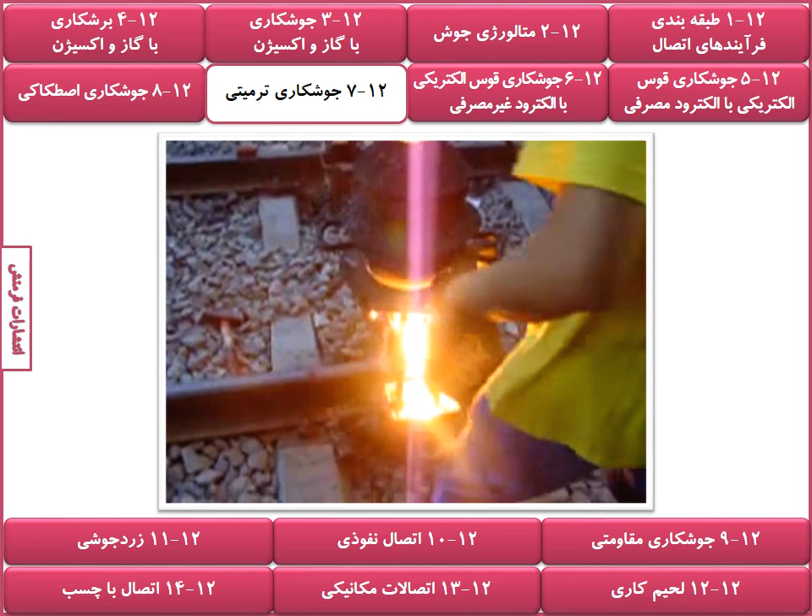How does inertia welding work? Basically, by forcing together pieces to be joined in such a way that rotary motion and pressure are converted into heat, which literally bonds the pieces into one part.

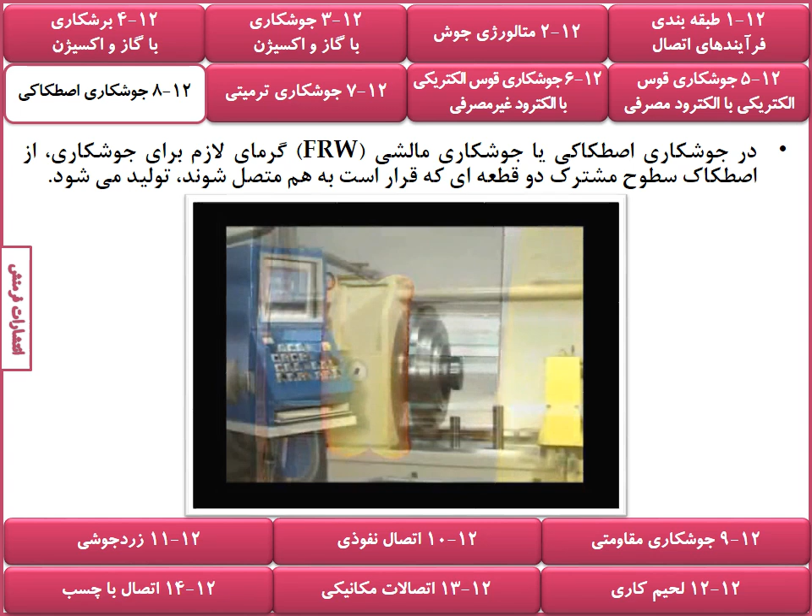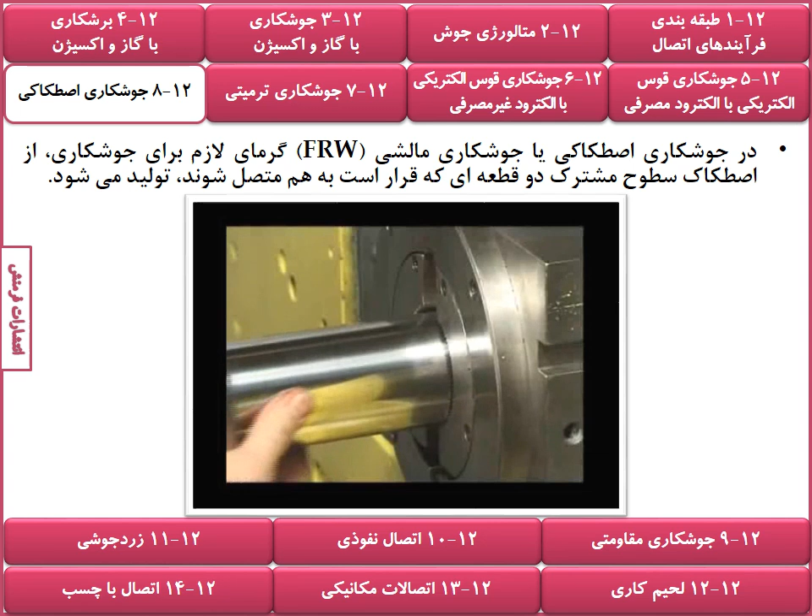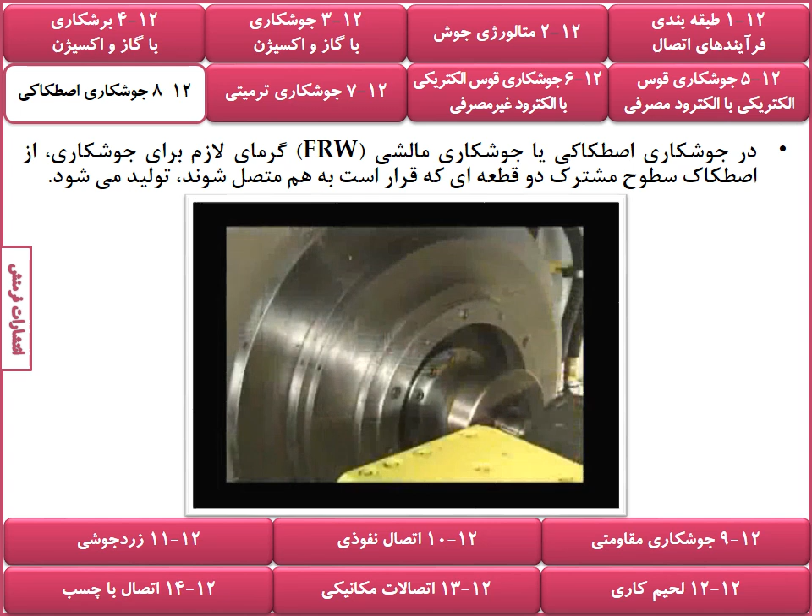Two pieces to be joined are aligned in an inertia welding machine. One piece is held stationary, the other is rotated rapidly on a spindle chuck attached to a flywheel. When the flywheel reaches a predetermined speed, it is disengaged and the freewheeling piece is forced against the stationary piece.

Friction between the parts heats the abutting surfaces to forging temperature. Just before rotation ceases, the two pieces bond automatically. When the flywheel stops, the weld is complete.

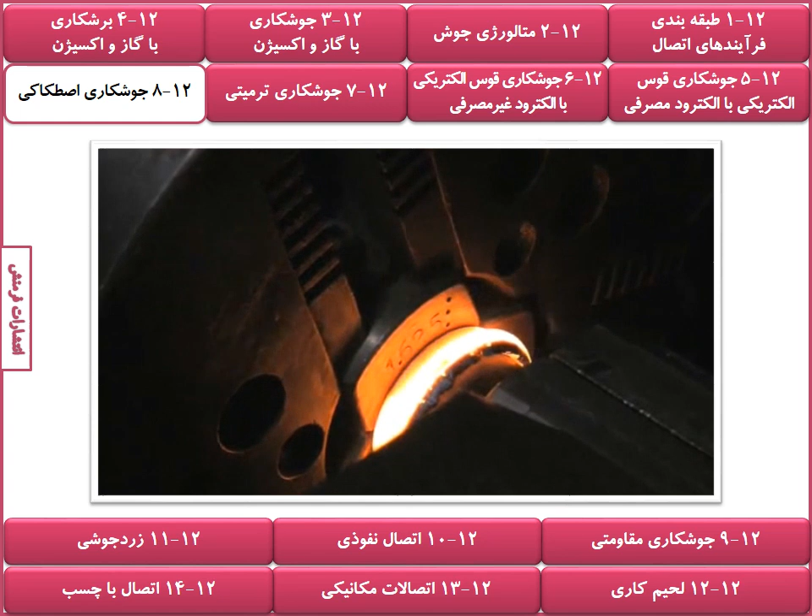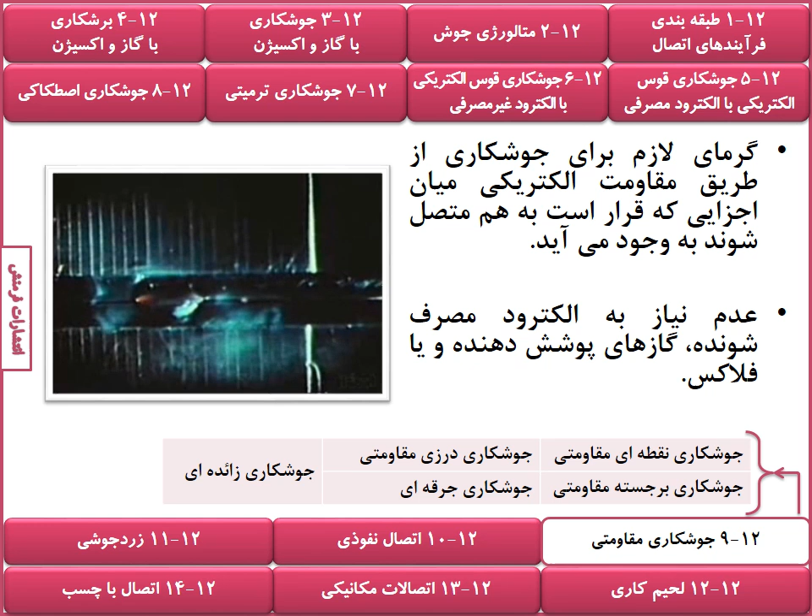With the aid of high-speed photography, we can see a projection weld as it takes place. A resistance weld is the result of steel components under pressure for a controlled period of time with current flowing, creating sufficient heat, causing the metals to coalesce.

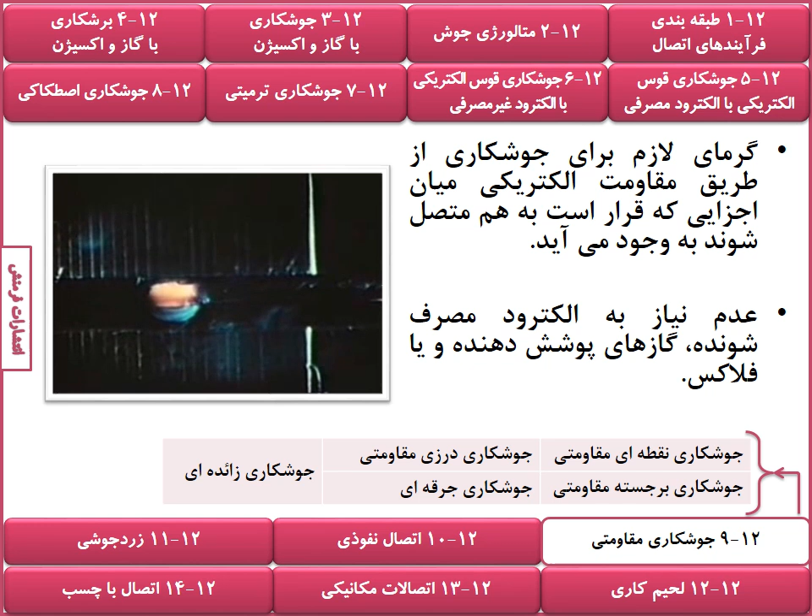When current ceases to flow and the area begins to cool, you have created a permanent bond. The basic factors for a resistance weld to take place are heat, time, and pressure. When these factors are in proper balance, an optimum weld will follow. This applies to both spot and projection welding.

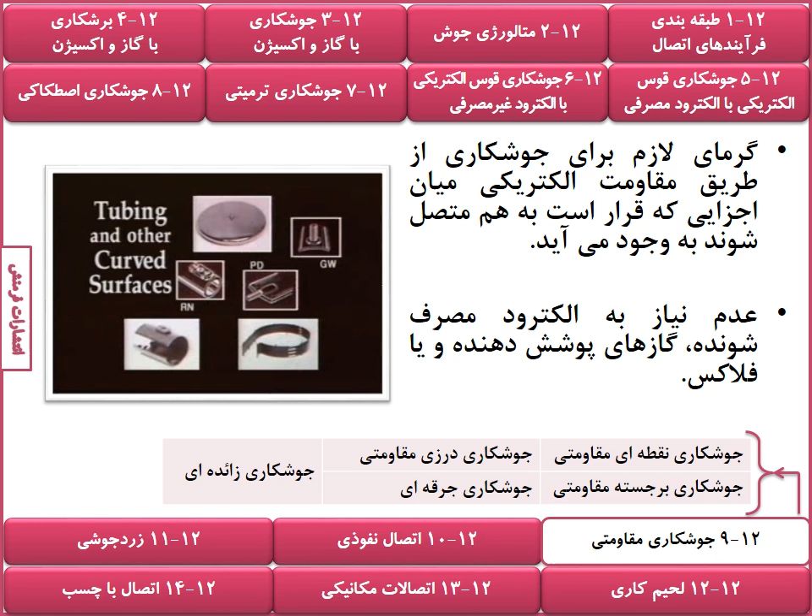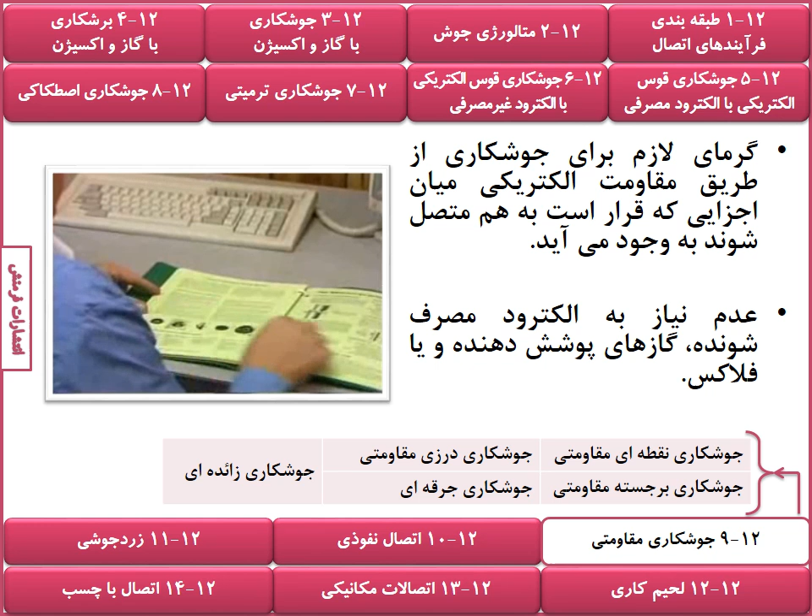Properly installed Ohio weld fasteners will provide an excellent attachment method without the need for secondary operations. Typical weld setups for Ohio parts welded to C1010 low-carbon cold-rolled sheets in a thickness range of 0.025 to 0.187 can be found in the weld data section of the standard Ohio weld fastener catalog. We have used these setup guidelines in all of our examples that will follow.

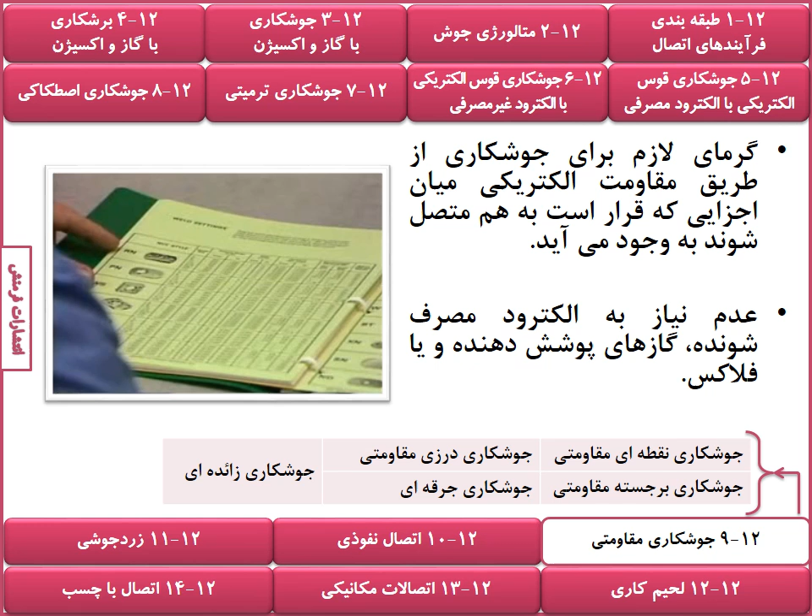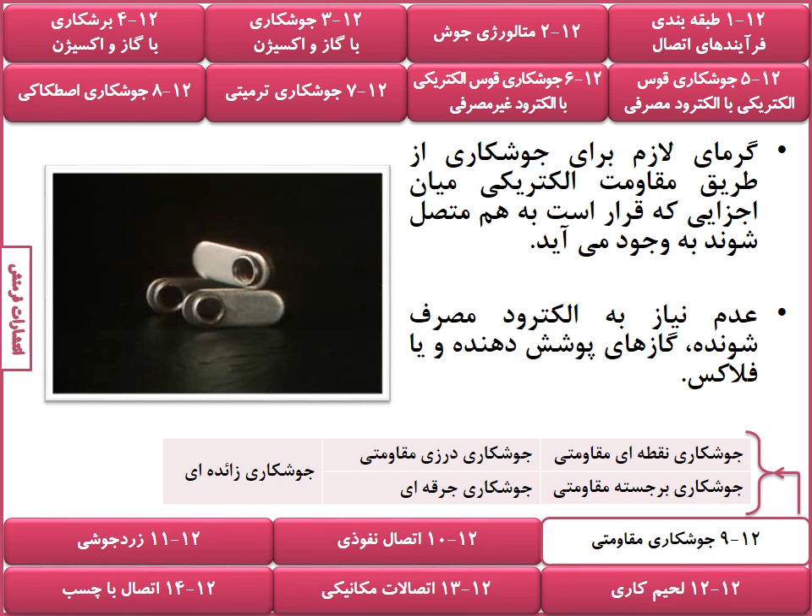We begin our weld demonstration with Ohio parts designed for spot welding. The first example is our XN style weld nut. The XN's narrow body enables it to be welded in corners and confined areas. The XN has a precision locating pilot, full threads, and is countersunk for easy entry of a mating part.

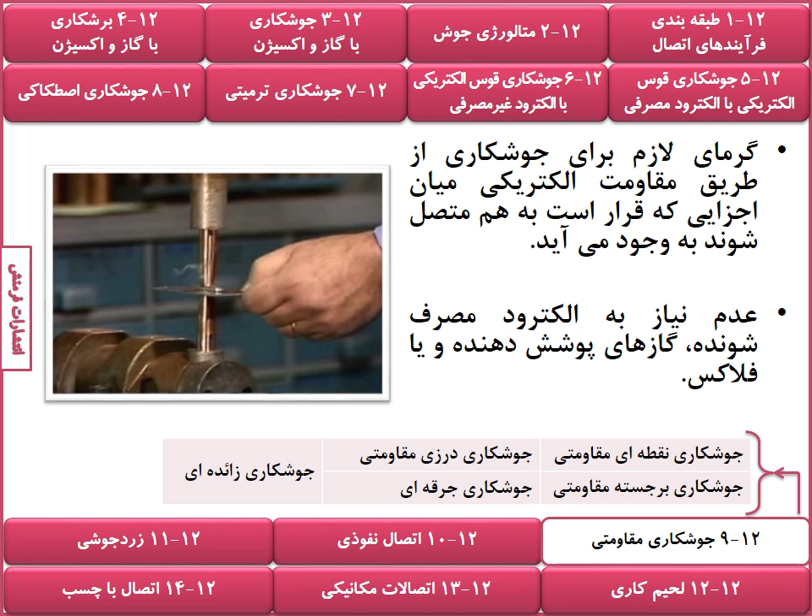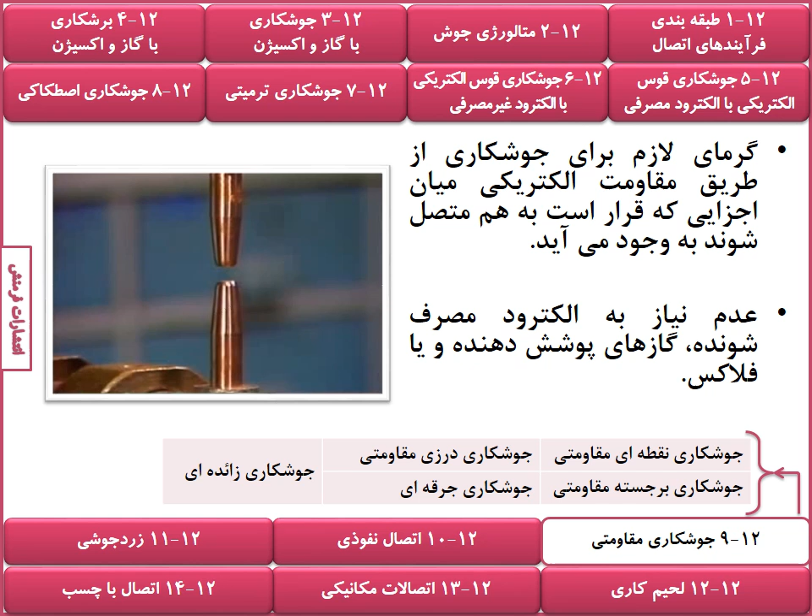As with all spot welding, the diameters of the electrode tips are extremely important as they control the size of the weld area. The basic spot weld technique of using a smaller diameter electrode tip on the thicker part and a larger diameter tip on the thinner material side is being used.

On the 1/4 20 and smaller XN sizes, there is a target area of reduced thickness. This creates a more favorable balance of material thickness when the XN is welded to lighter stock.

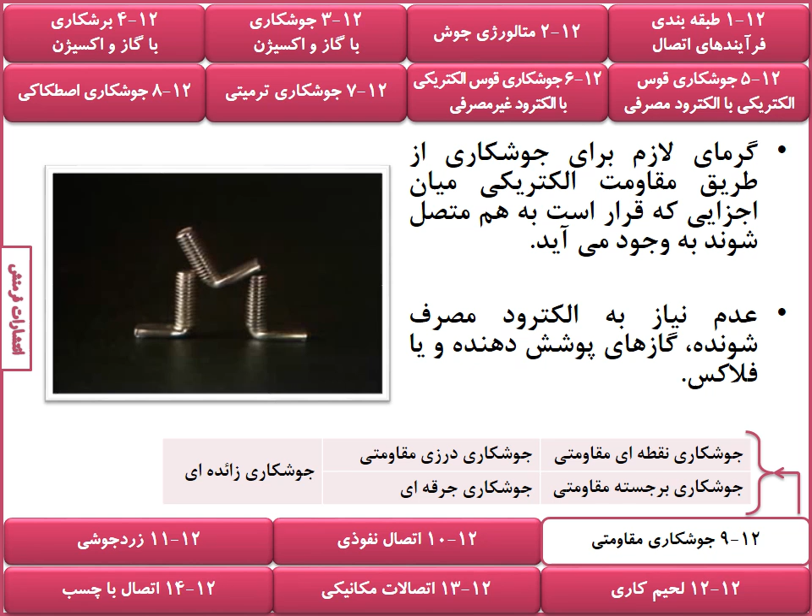Our SS-style spot weld spade screw has an ideally shaped flat spade at right angles to the threads. The spade permits welding to or through metal surfaces. The spade has been designed to be used with various sizes of electrode tips.

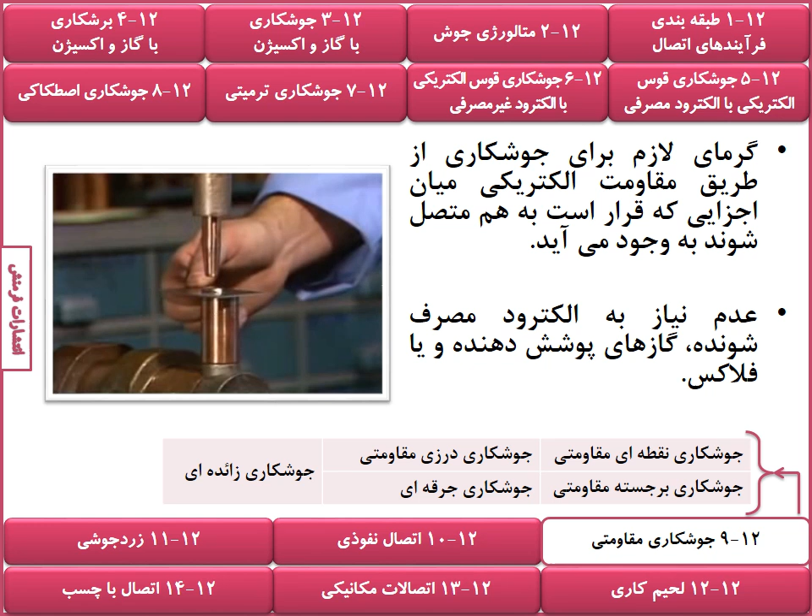It is designed to fit in confined areas, such as narrow channels, walled corners, and in those applications requiring threads offset from component surfaces. Again, the smaller diameter electrode will be on the thicker material, in this case the spade of the SS weld screw.

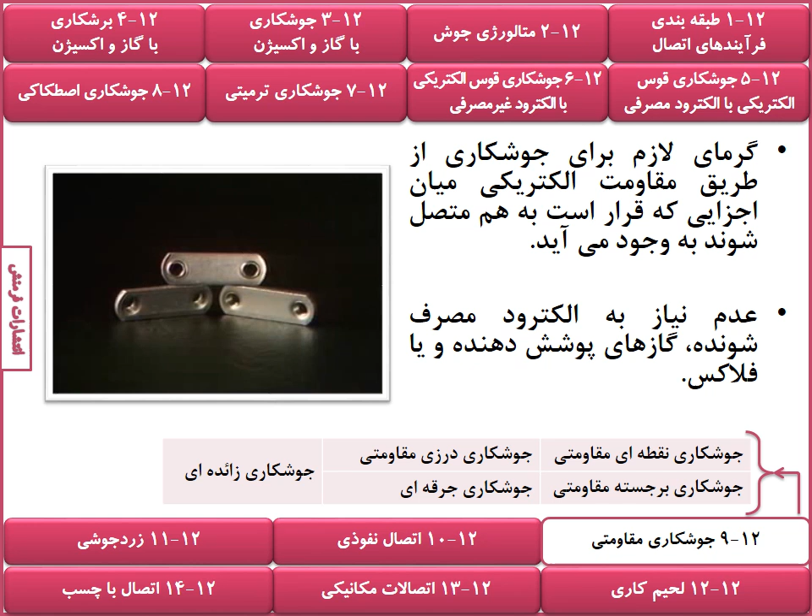Our final spot weld example will be an Ohio TP, a twin-piloted spot weld nut. Use of the Ohio TP nut eliminates the need for two individual nuts.

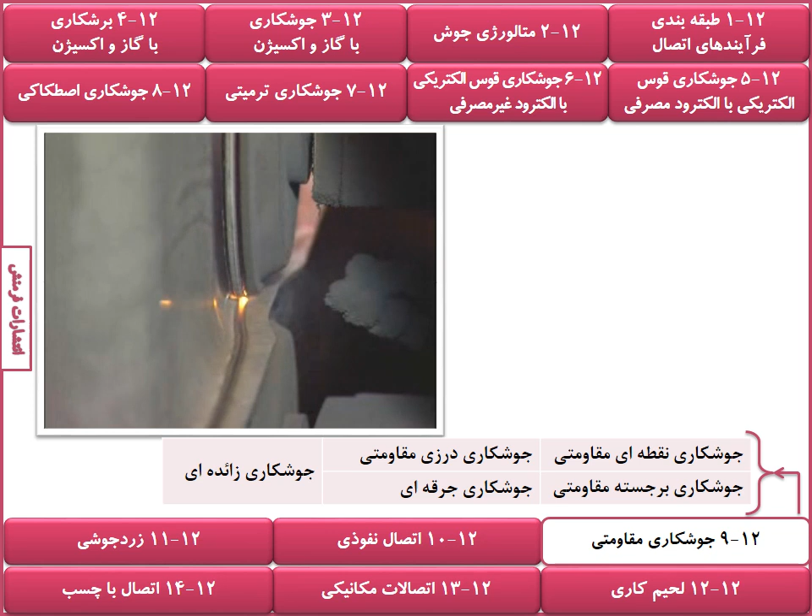Very high electric currents are used to quickly produce the resistance heat necessary for fusion. The three principal types of resistance welding are spot welding, seam welding, and projection welding.

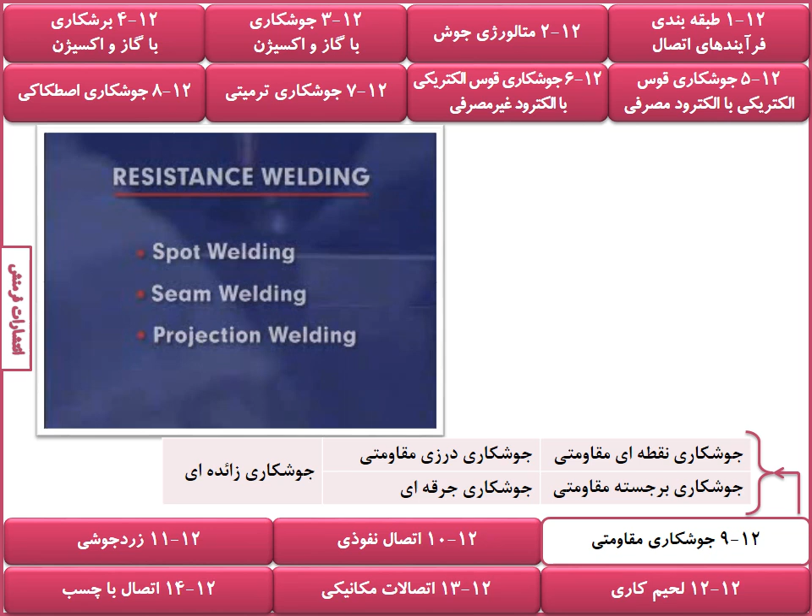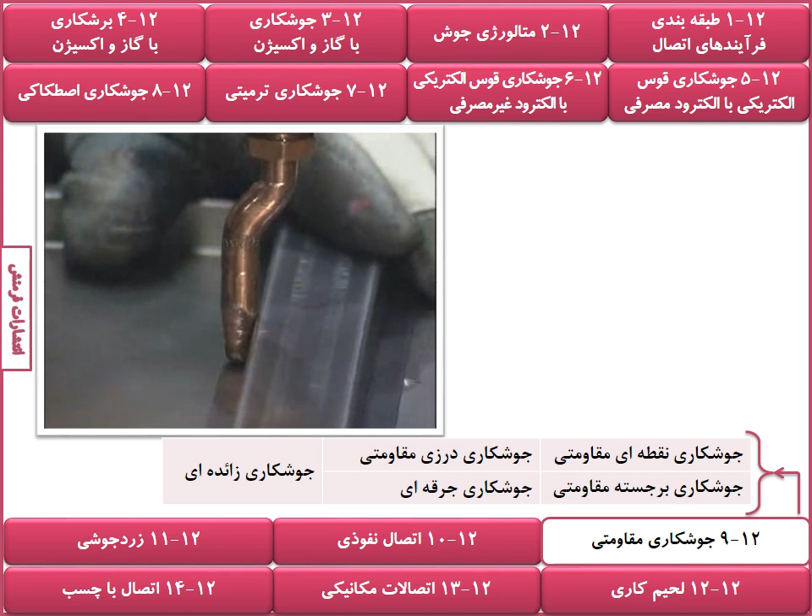Spot welding refers to making welds one at a time between the electrodes. One, several, or many individual spot welds may be required, depending on the application. Spot welding, with the electrodes maneuvered by articulated arm robots, is commonly used to join sheet components of automobiles.

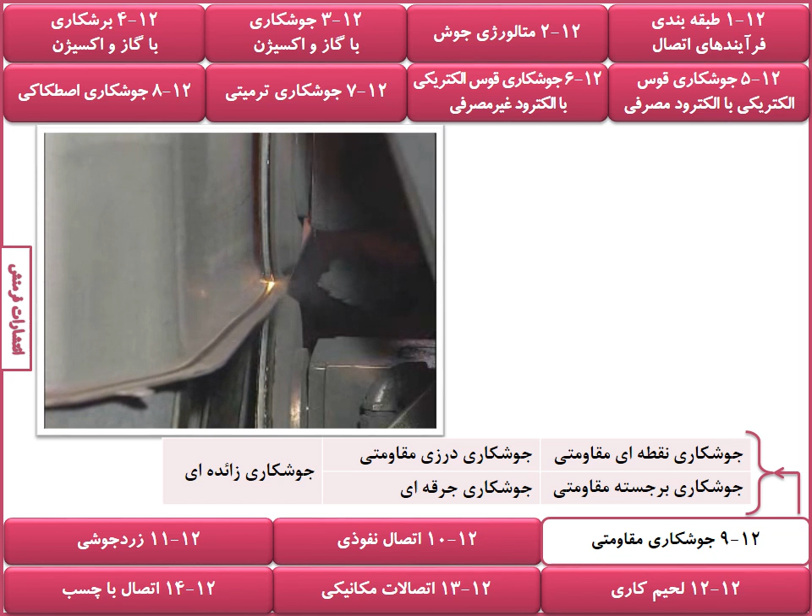In seam welding, coordinated pulses of electric current from rotating wheel electrodes produce a series of overlapping spot welds, resulting in a leak-tight welded joint.

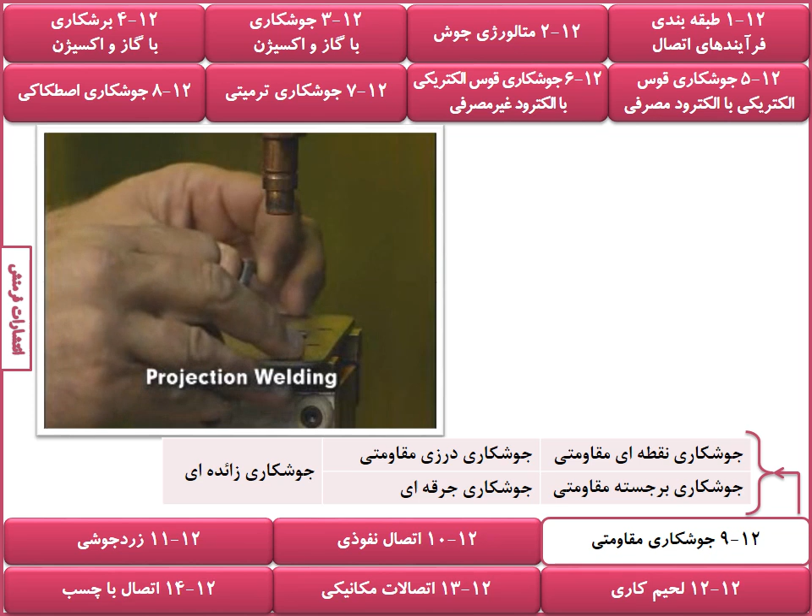In projection welding, the welds are localized at predetermined points by projections, embossments, or intersections. Several points may be welded simultaneously.

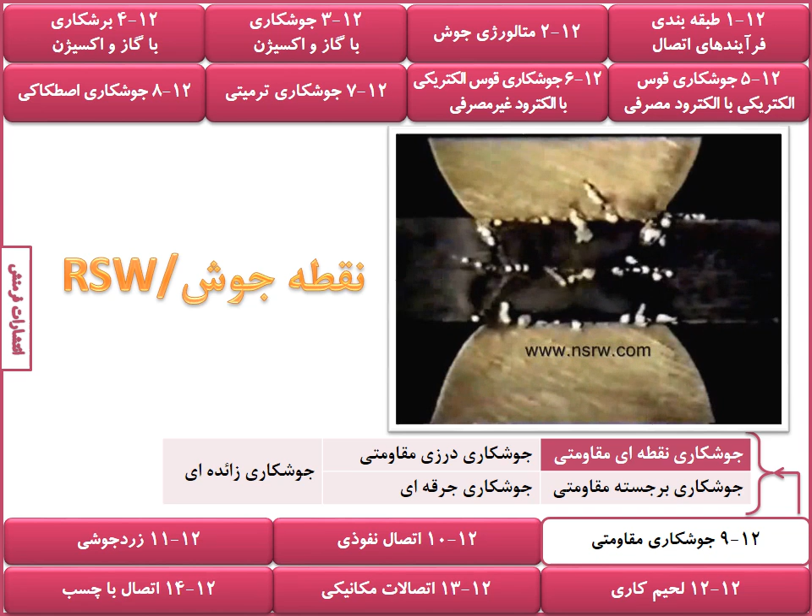NSRW is a metal service center. We specialize in copper and copper alloys. Our inventory includes chrome copper, zirconium copper, beryllium copper, copper tungsten, pure tungsten, and molybdenum. We stock rounds, squares, rectangle bar, hex, and plate. Our vast inventory allows for immediate shipment, most times same day.

Our inventory also includes a full line supply of welding components, from standard and special electrodes to controls, transformers, cables, and shunts. We customize our inventory for your specific needs, allowing us to offer just-in-time shipments for your convenience. We rebuild and retool old equipment, and we offer application and service engineers trained and experienced in all aspects of resistance welding.

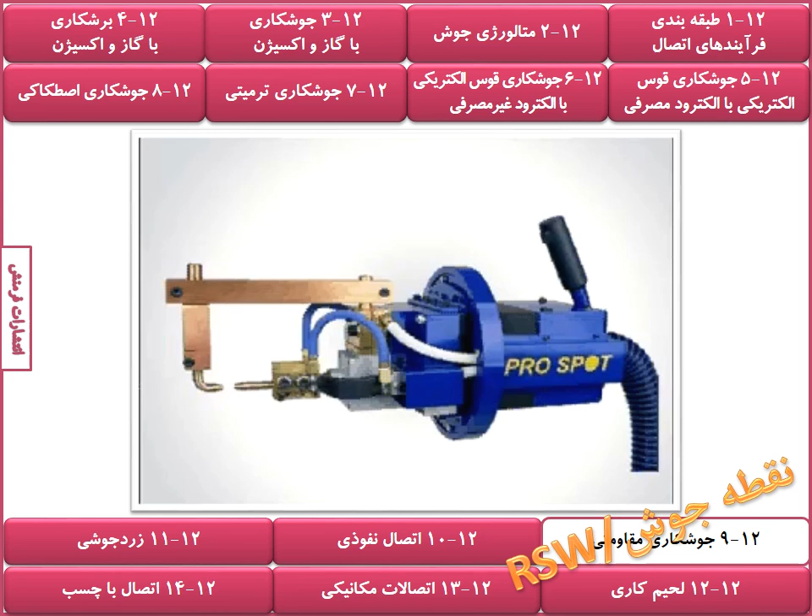A resistance spot welder is designed to deliver a low-voltage, high-current electrical pulse. The weld electrodes are made of copper because copper has a low resistance to current flow, which allows it to conduct electricity with ease.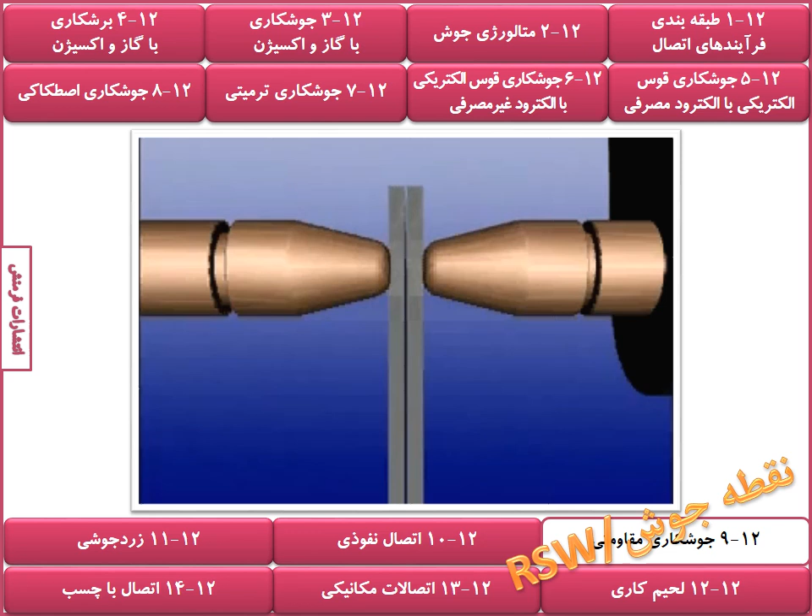Steel is a very poor conductor of electricity, and it will resist the weld current as it flows from the spot welder. The friction created by the current forcing its way through the metal heats the weld area to over 2,000 degrees Fahrenheit. The squeeze pressure from the weld electrodes now compresses the molten area and fuses the two metal surfaces into one solid nugget.

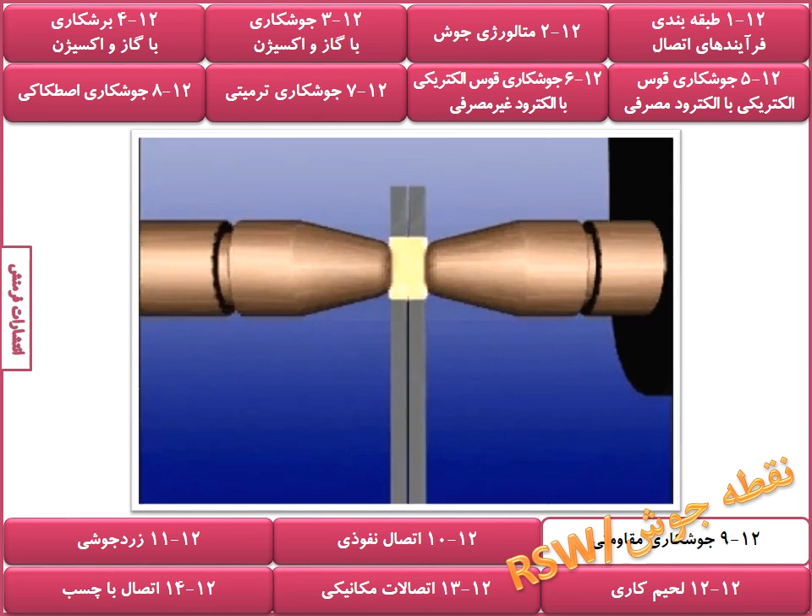By maintaining the squeeze pressure for a short time after the weld current is shut off, which is known as hold time, the molecules in the welded material remain compressed as the weld cools. This additional pressure results in a much stronger weld.

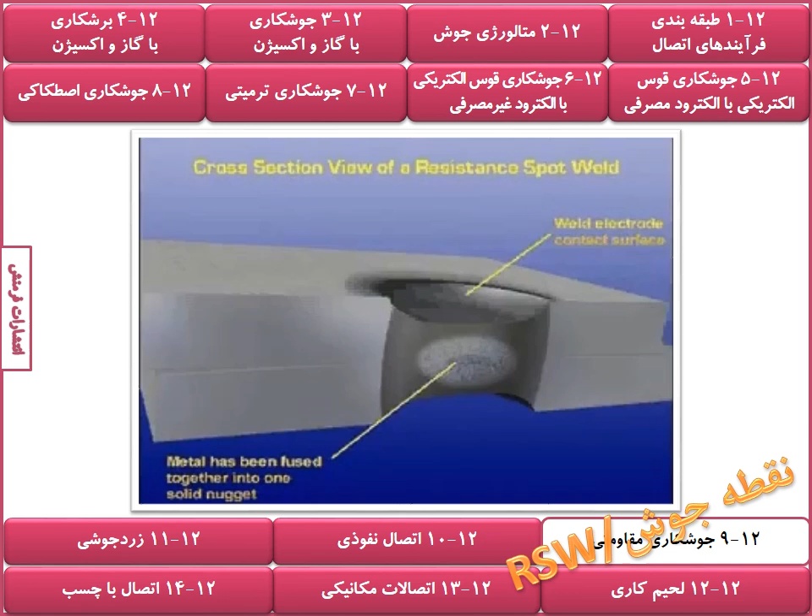Electricity in your shop, how it works, and why you need to understand how it affects the performance of your welders and other equipment. Single phase: this is how the electricity is delivered from the electric company. When viewed in an oscilloscope, you can see the current as a sine wave form that alternates between positive and negative polarity across the zero line. This form of electricity is called alternating current, or AC.

The frequency of the wave cycles is always consistent, and it is measured in cycles per second, or hertz. 1 hertz is one complete wave of current starting at zero, moving up to the maximum or peak level, falling down through zero, and then up again from the negative peak to the zero line again.

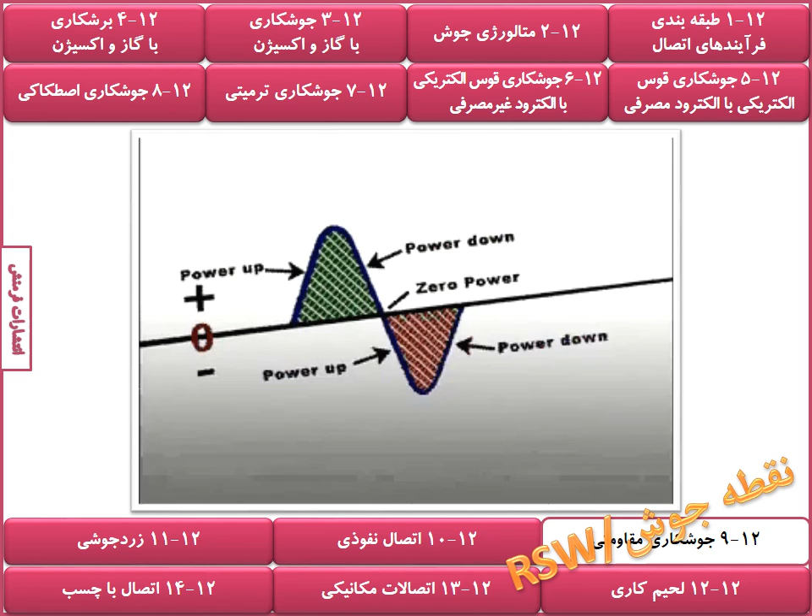Let's look up close at one sine wave. The AC current waveform alternates through the zero line from positive to negative. At 3 different times in one cycle, the power is zero as the current completes the cycle. This means that there are inherent losses involved in AC power.

The losses result in inefficient use of available power, and when used with resistance spot welding, the weld quality is negatively affected. As you can see in the slow motion graphic of this spot weld, there is an irregular, pulsating 60 Hz delivery of current.

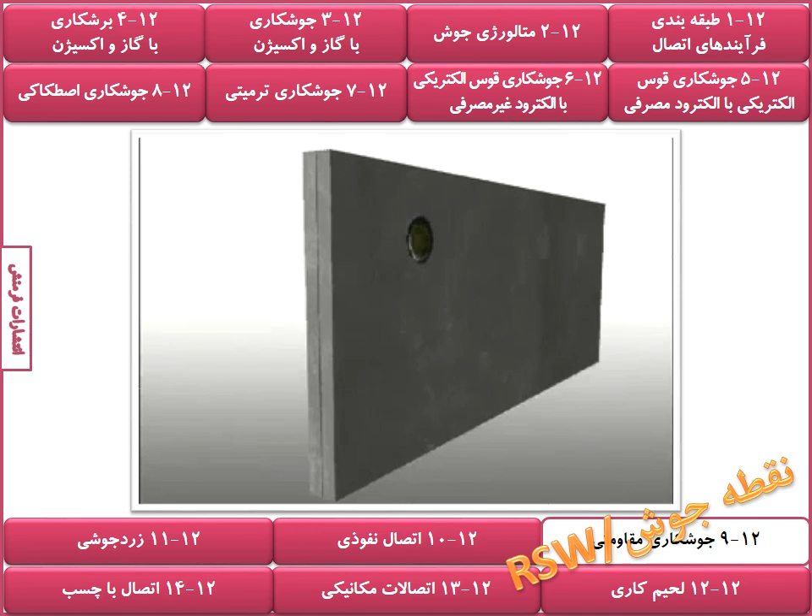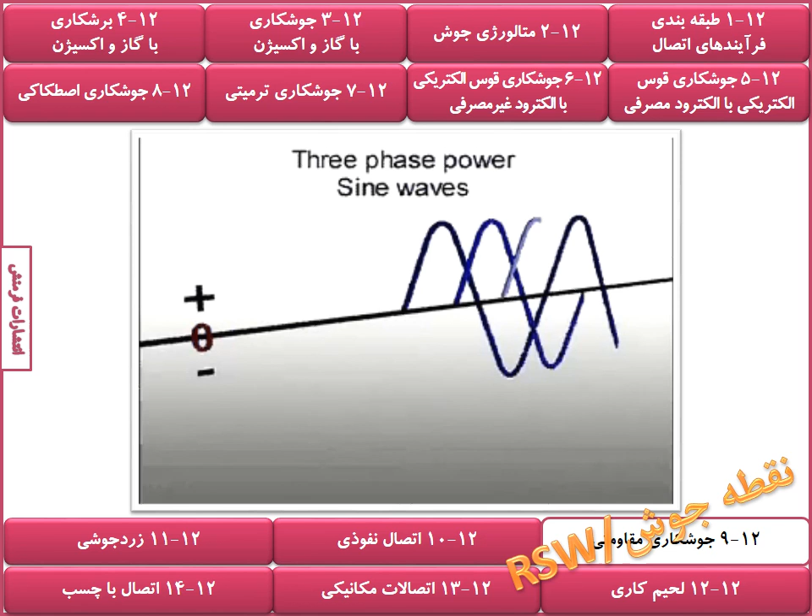Get 3-phase power from the electric company if you want to use better welder technology for better welds. The entire waveform starts out as a single cycle, but it is followed by a second sine wave delivered 120 degrees after the first one, and a third sine wave is started 120 degrees after the second one. Remember, AC current has 1 sine wave per cycle, but 3-phase current has 3 sine waves.

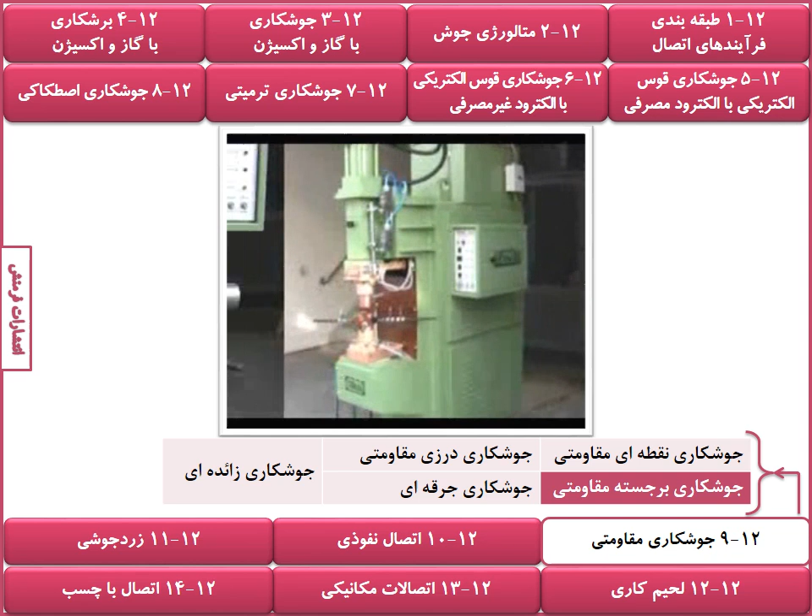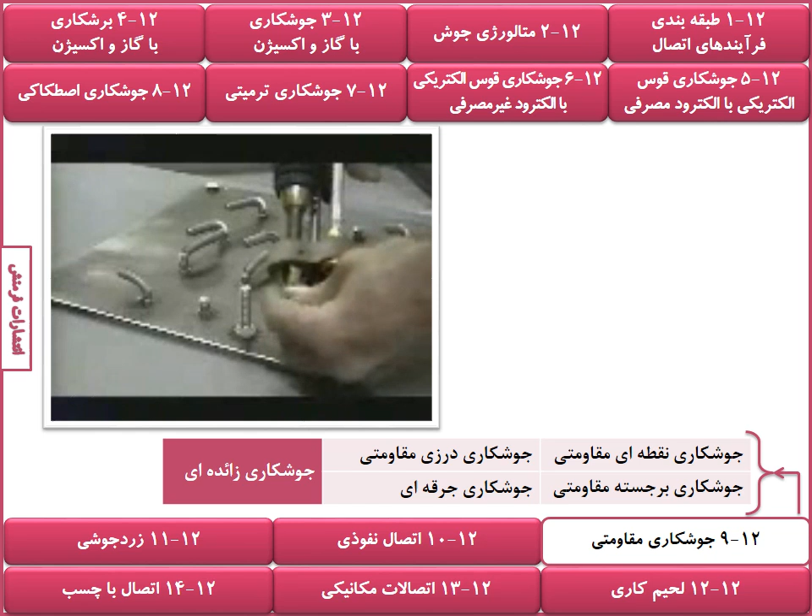Arc stud welding is generally used to weld large diameter fasteners to more porous and thicker base metals. A fastener and ceramic ferrule are firmly placed against the work surface under spring tension. Upon triggering, the weld gun automatically lifts the fastener from the base metal and initiates a controlled electric arc which melts the end of the fastener and a portion of the base metal.

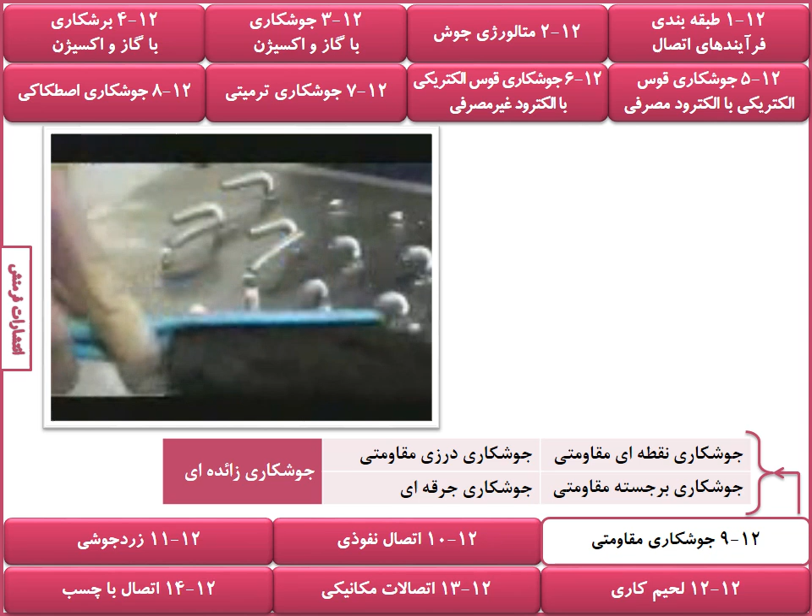At the precise moment the fastener and the parent metal become molten, the fastener is automatically plunged into the work surface. The metal solidifies, and a high-quality, full cross-section, full penetration weld is completed.